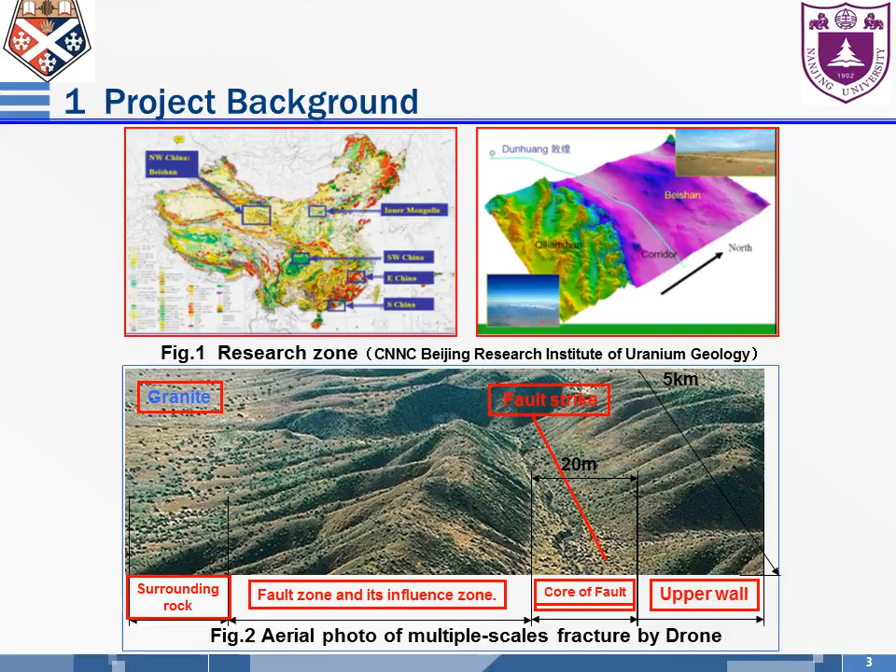This is the background. Figure one is the research zone, which is in Gansu province, China. Figure two is an aerial photo of the multi-scale fracture by drone. You can see there are a lot of kinds of fracture in this research zone. Due to tectonic movement, fault fracture zone, injuries of the nuclear area, and the influence zone, these multiple sets of cracks can cause poor conductivity and low permeability coefficient in the development of hard rock fracture seepage channels into different scales. It is likely to become a potential groundwater migration channel.

So the field of underground engineering is facing huge challenges. To more accurately grasp the characteristics of the permeability of the rock mass and fracture at different scales, analyzing the phenomena of geological structure internal model, genetic mechanism and dynamic principle is particularly important. Fracture and pore medium migration rules can provide a scientific basis for underground engineering.

Figures 3, 4, and 5 show the fracture zone, damage zone, and surrounding rock fracture. These fractures are exactly what we want to research.

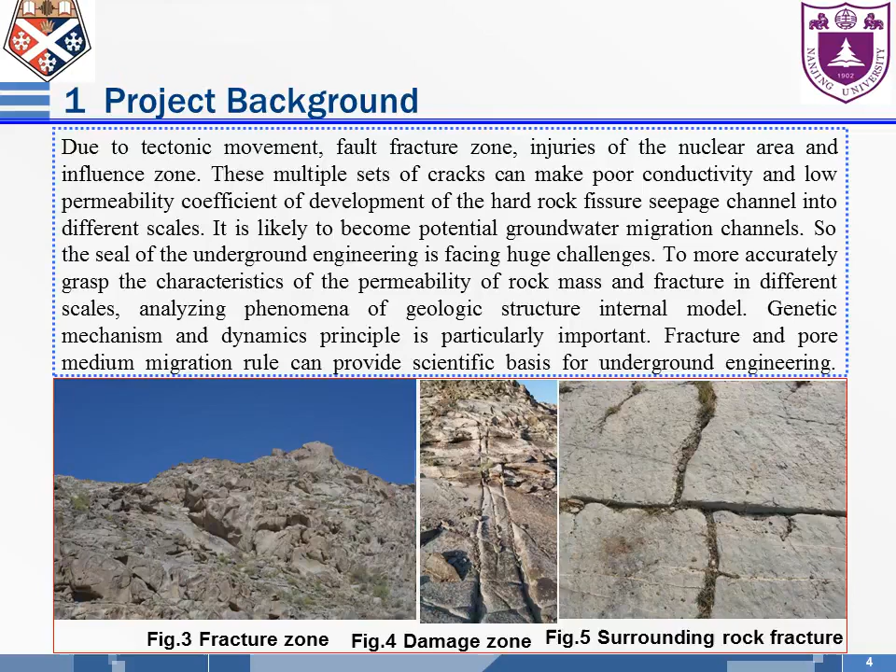Different scales of fracture have different meanings, and they are graded based on the scale of the structure surface, which is generally divided into five grades. The first and second grade fractures can be referred to as fault zones, mainly researching the control effect on regional structure. The fault length and width difference is the macroscopic guide water dominant factor.

Third, fourth, and fifth grade fractures can be collectively referred to as joints, relatively small in scale, with the main research on outcrop, palm surface, and probing fissure joints. The extension length and opening degree of the joints are the main factors affecting the local stability and permeability of the rock mass.

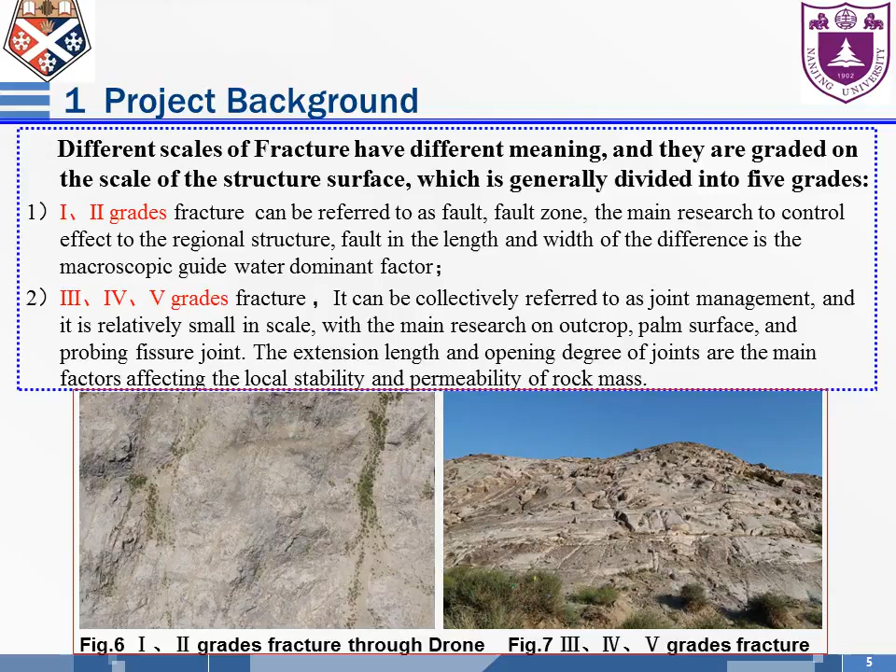Figures 6 and 7 show the first, second, third, fourth, and fifth grade fractures through drone and photographs.

So most of my project can be seen from figure 8, the sketch of the nuclide transport at multiple scales of size and depth of the fracture.

I want to figure out the relationship between the apparent resistivity and the multiple scales of size and depth of the rock fracture with ERT. The first is the size, the second is the depth, and the third is how to reflect the effect of the plastic tube, which stands for higher resistivity, or iron tube, which stands for low resistivity, and the tank.

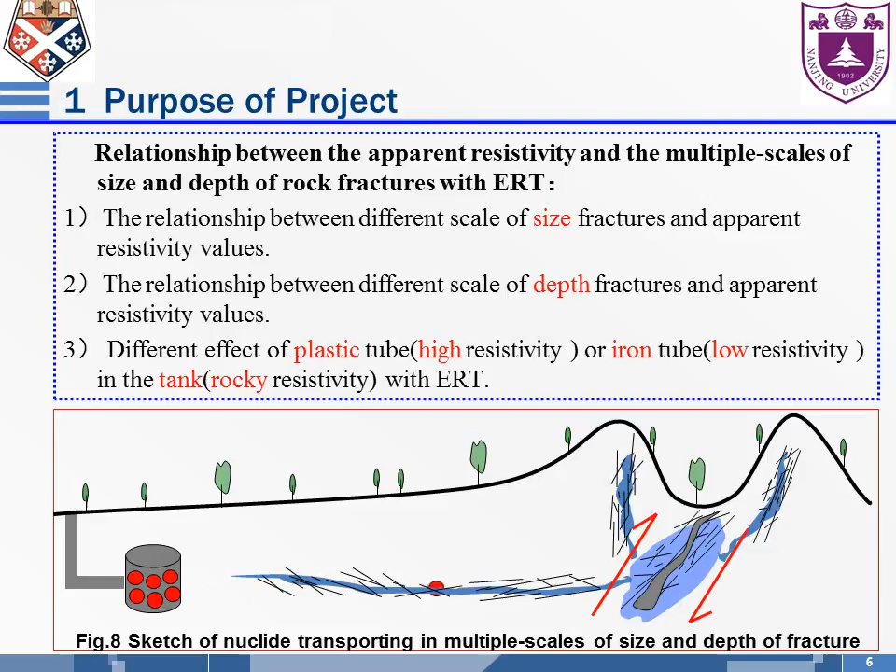The tank stands for the rocky resistivity with the ERT. In figure 8, you can see the nuclide transported over time in the fracture.

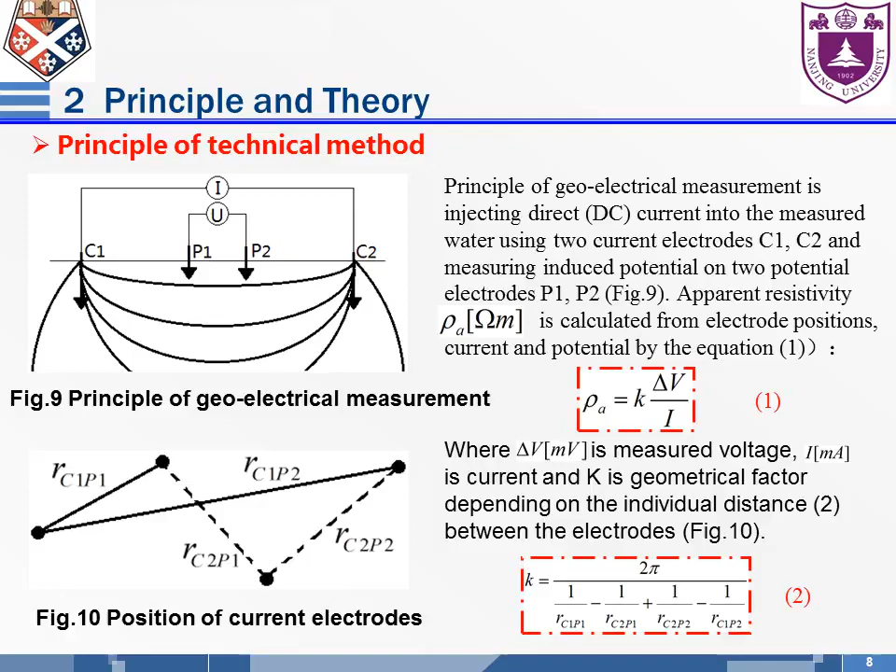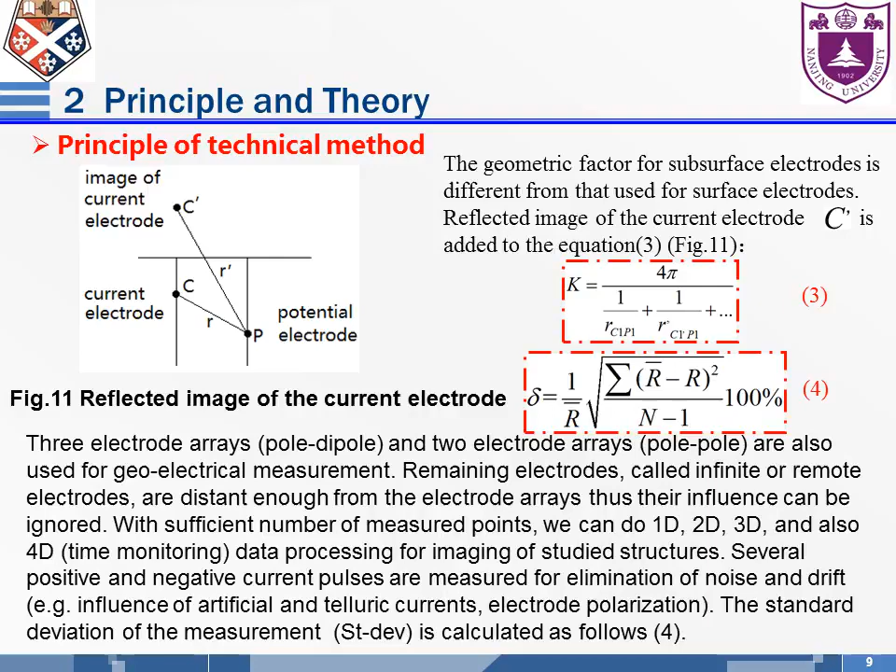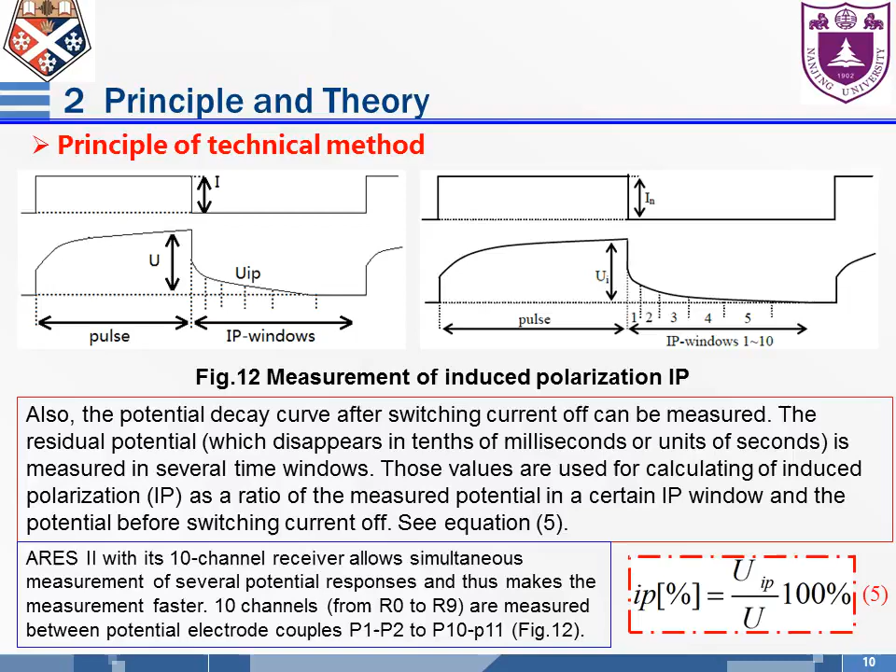The measurement of the induced polarization (IP) is mainly done with the ARES II series. The ARES II, with its 10-channel receiver, allows simultaneous measurement of several potential responses, making the measurement faster. This is the equipment we use; our third part is methods, parameters, and equipment.

Here is the sketch map showing different equations and electrode configurations. You can see the different positions of the electrodes in different kinds of measurement methods. But the different arrays can also be calculated into the same parameters. I'm going to choose the first one, the Wenner-Schlumberger array.

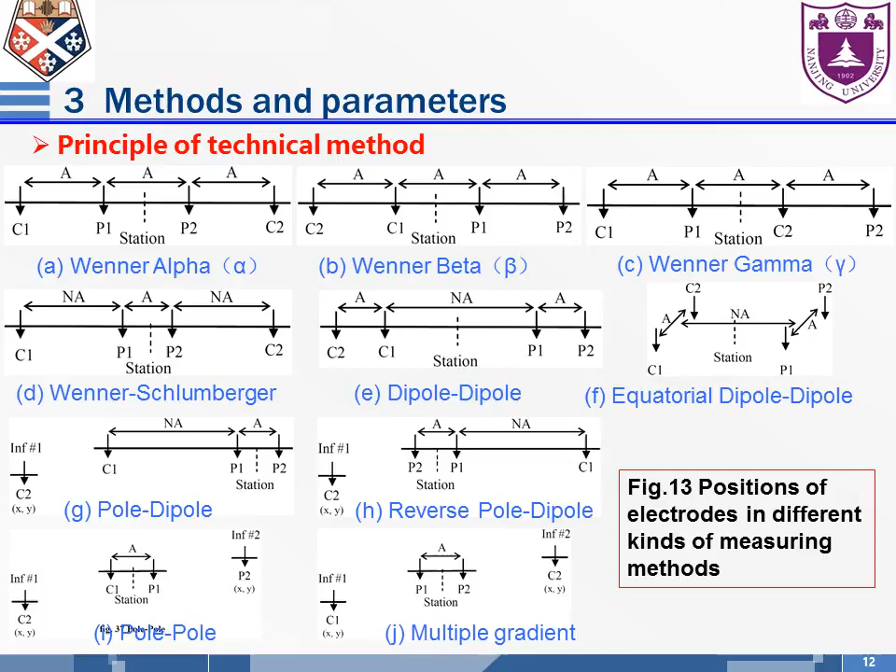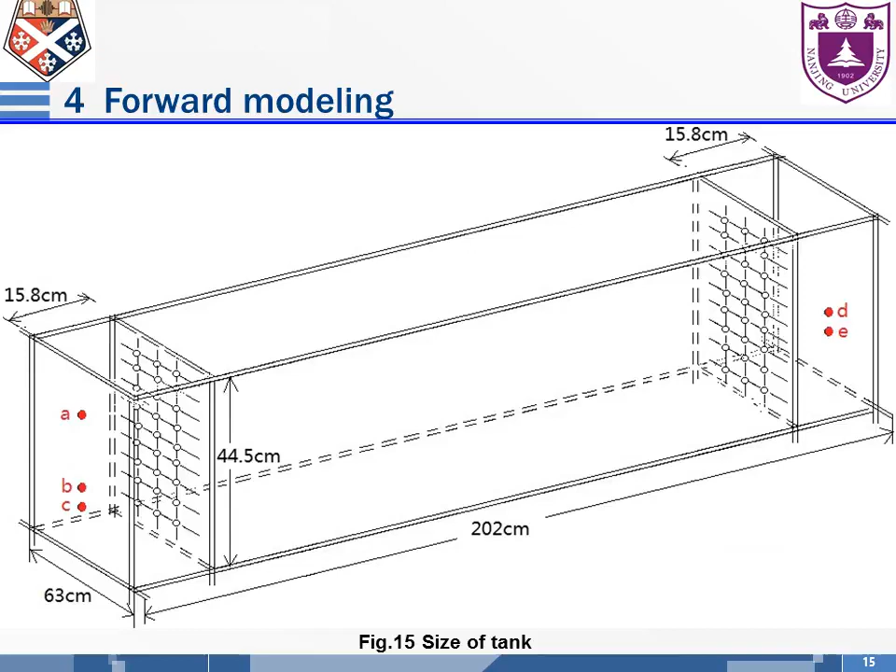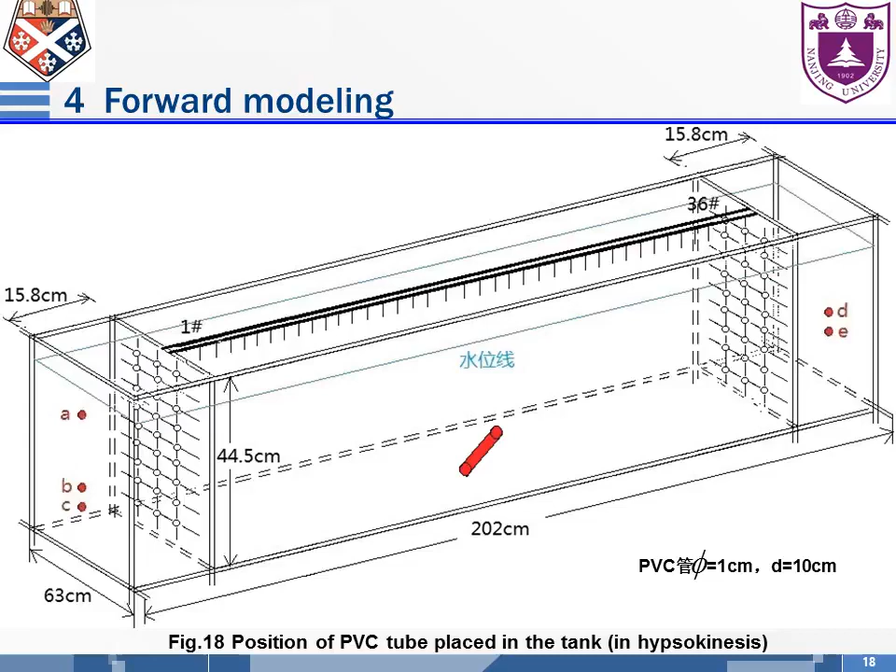This all the equipment, and the fourth part is the forward inversion and the experiment, this is the forward modeling. I built it as the experimental test, like the tank, same size and same condition. This is the plastic, PVC tube I placed into the tank, in what you call hypsokinesis flow rate. This is forward modeling.

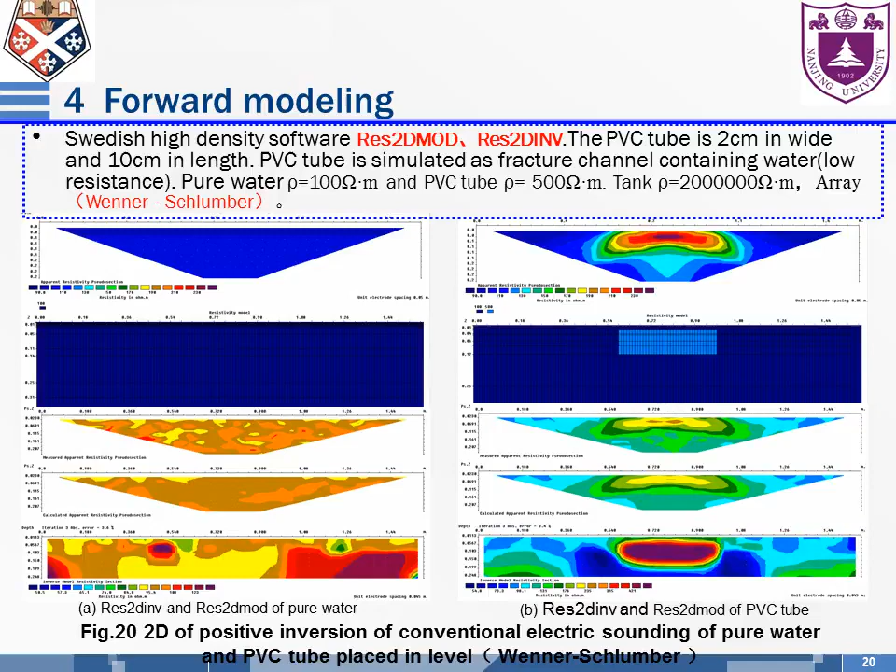I use the Swedish high density software, Res2DMOD modeling, and the Res2DINV inversion to calculate the PVC tube. From the left is pure water, and the right side is a PVC tube. I placed it in level, you can see it has a good effect.

This is using Advanced Geoscience Corporation EarthImager 2D high density software. I calculated the high and low resistive fracture tube. The tube is 2 centimeters in length on the side. High resistance is for air, and low resistance is for water. You can see there's a good, abnormal response of the forward model.

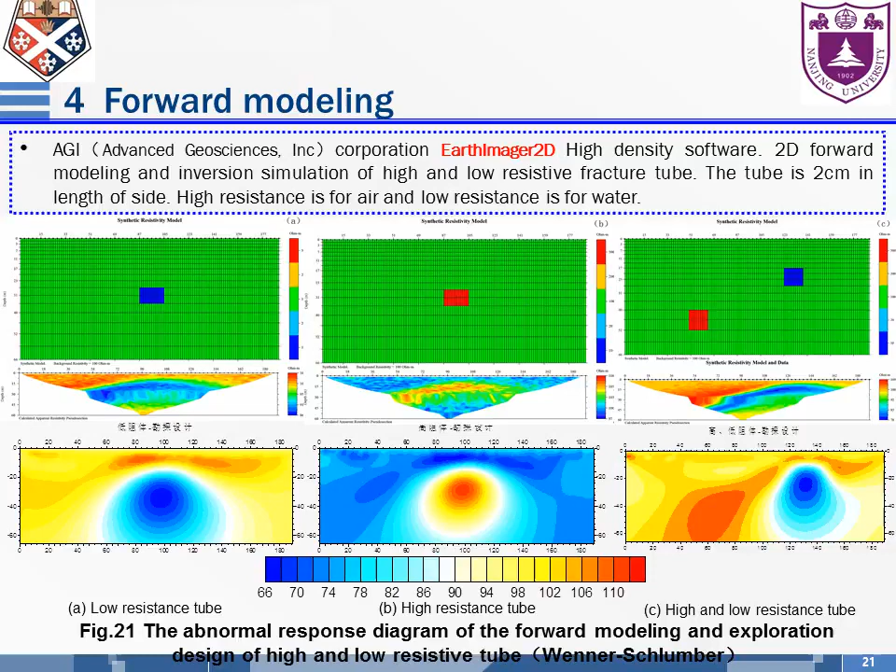Exploration design of higher and low resistive tube, the array I used was Wenner-Schlumberger. I simulated it as the fracture channel. The blue stands for the water channel, and the red one stands for the air channel. You can see the abnormal response.

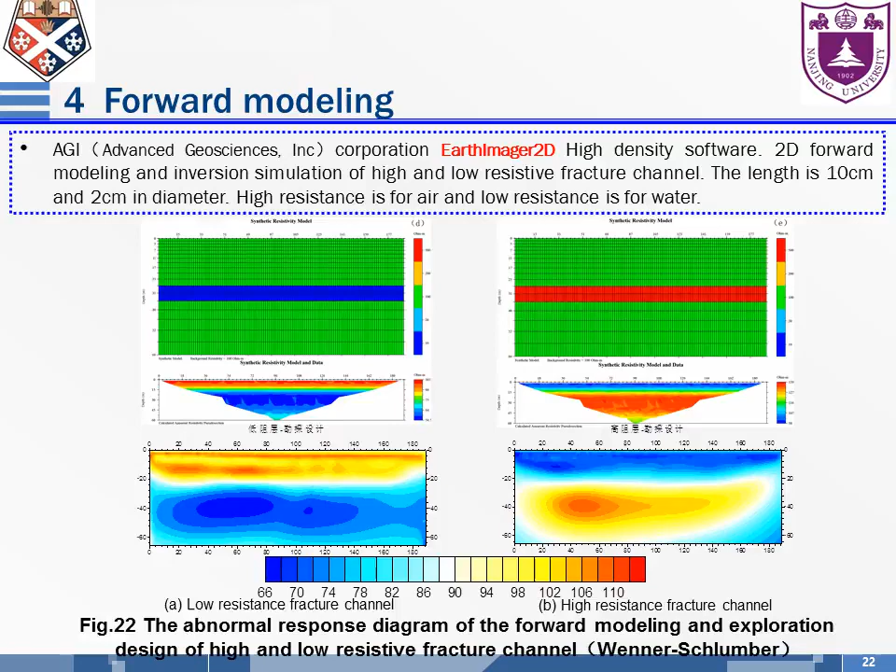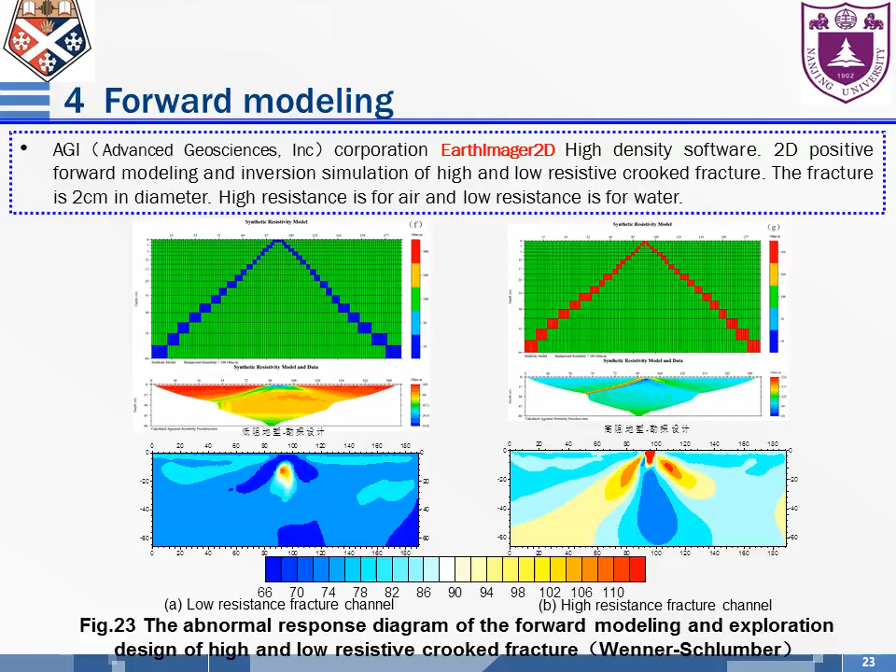This stands for the crooked fracture. The blue one is also the higher resistive, low resistive fracture channel, and the red one stands for the higher resistive crooked fracture. That also has a good effect, but not very good.

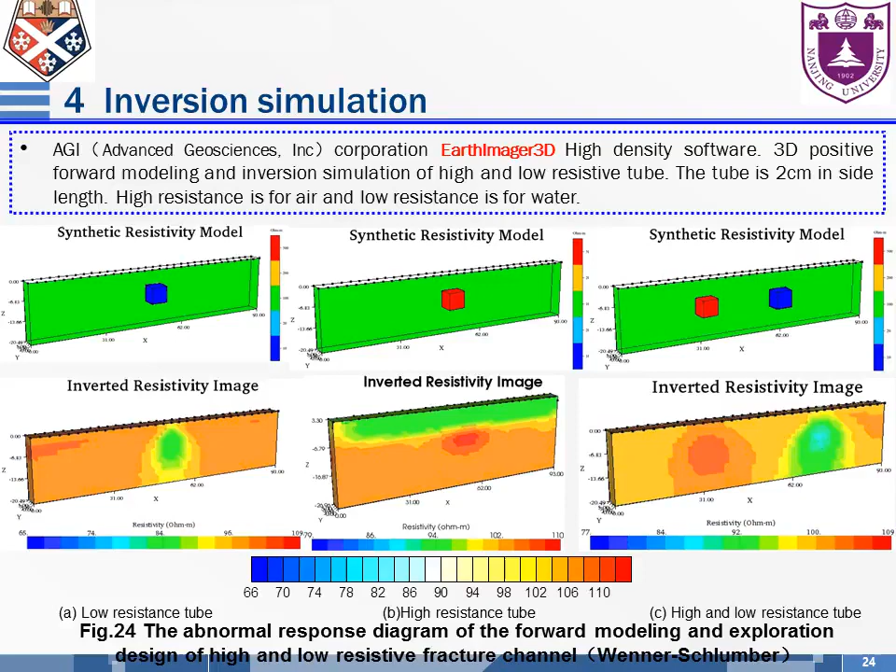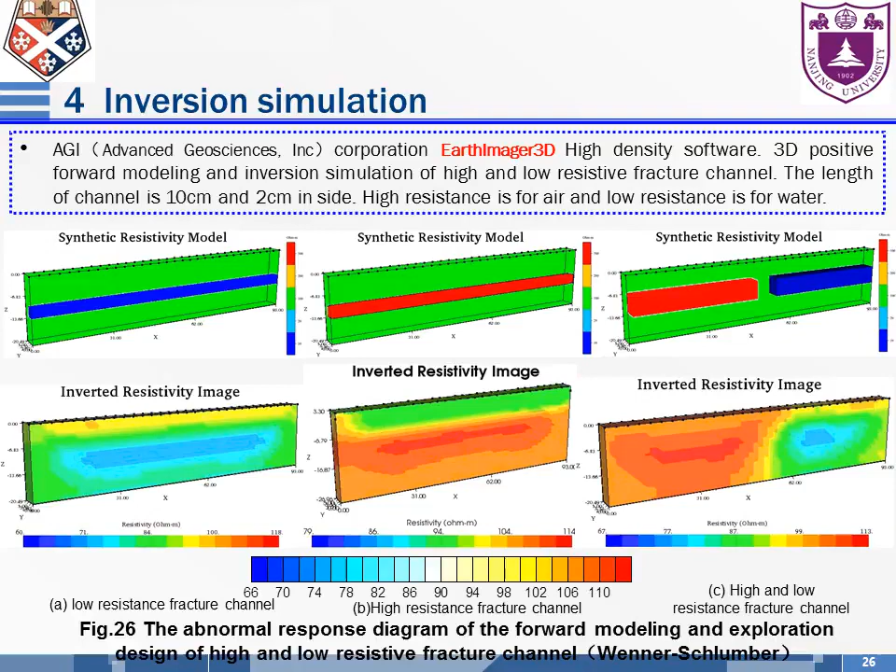This is an abnormal response slice map of the high and low resistive tube, standing for the fracture channel. You can also see some good effect and exploration design in figure 26. This is an abnormal response slice map of the high and low resistive fracture channel.

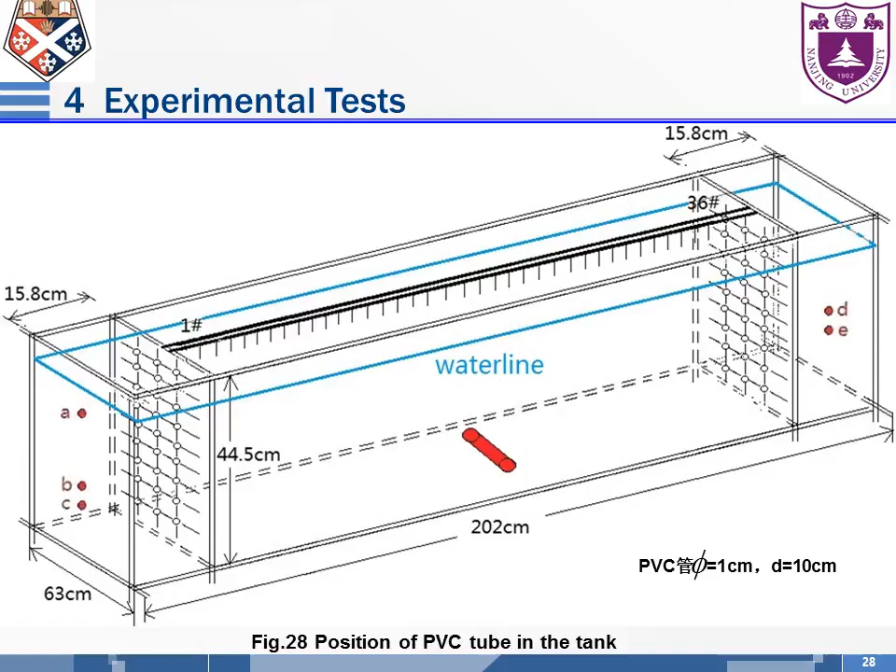After all this forward modeling and inversion simulation, I carried out a lot of experimental tests. This is the position of the PVC tube in the tank, and this is a flow rack. You can see exactly the same size, position of the electrodes, and some of the parameters of the electrodes.

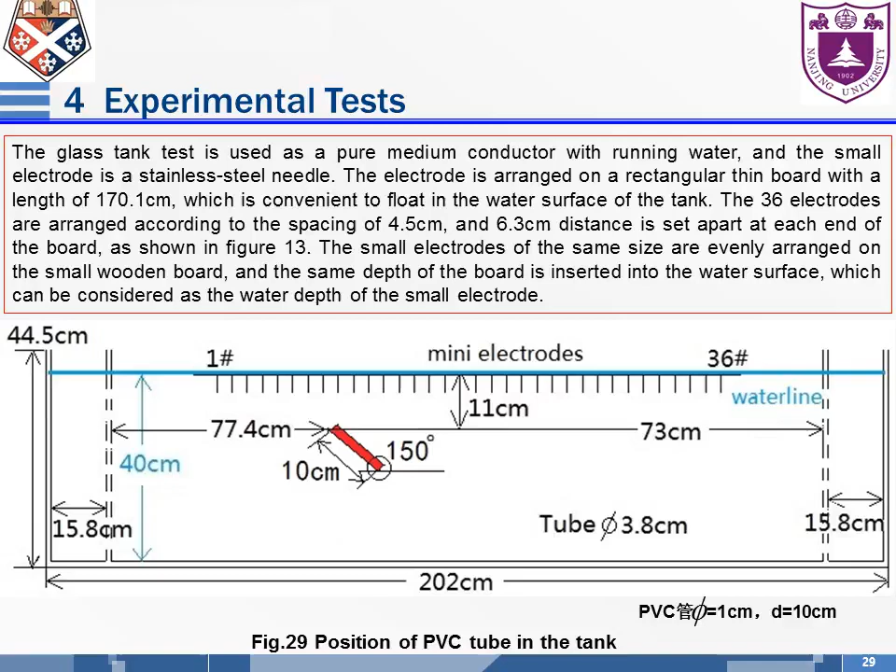This photo stands for the experimental test procedure: the tank, the fracture model, the copper electrodes and instruments, and the forward modeling and inversion simulation.

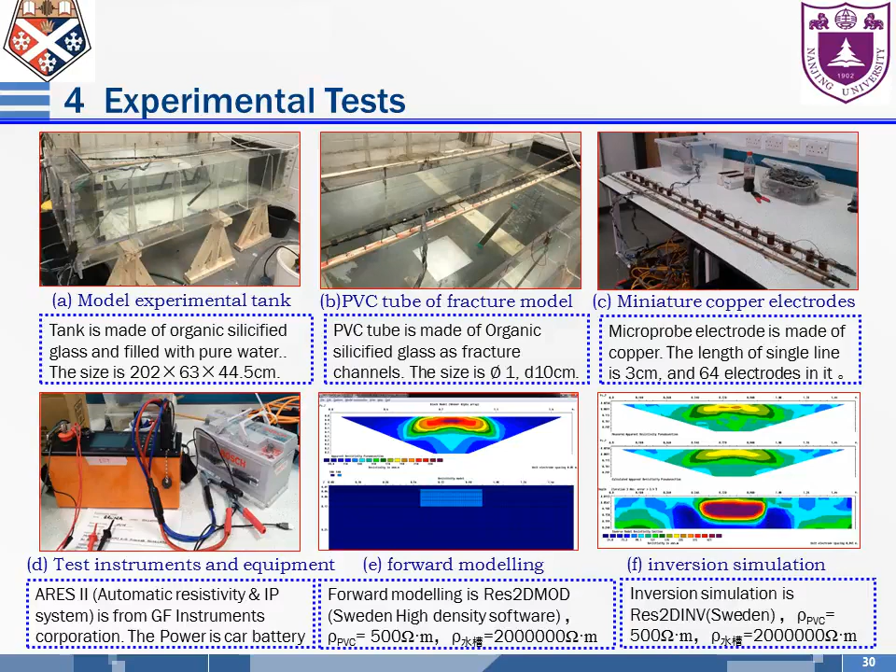Finally, I got some results of the physical simulation test of the small scale fracture monitoring issue. I carried out a lot of tests, but this one is typical, it has exactly what I want.

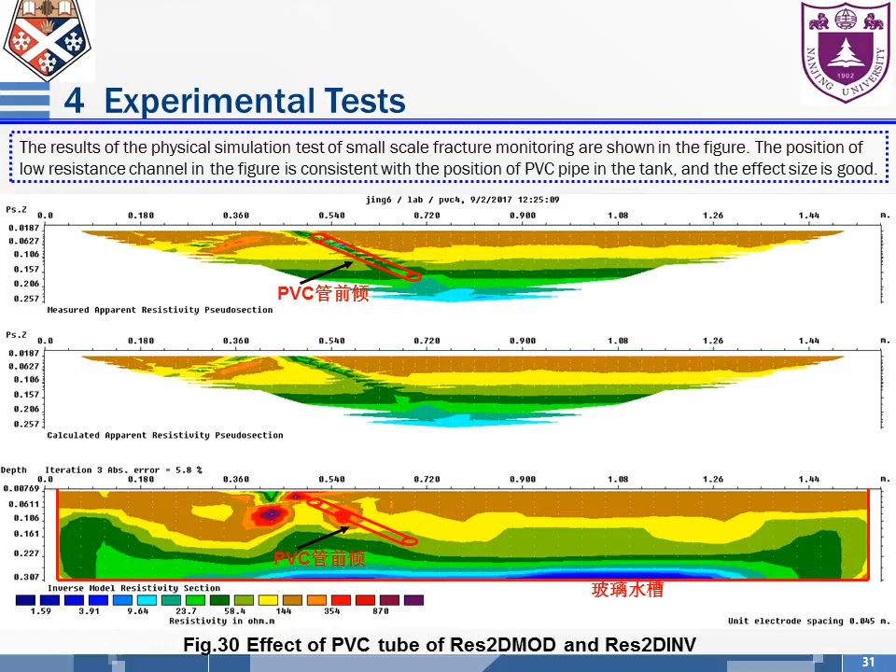The position of the low resistance channel in the figure is consistent with the position of the PVC pipe in the tank, and the effect size is good. You can see from figure 13, 30.

So let's move to the results. I come up with four conclusions. The first, you can see the blue represents low resistivity and the red represents higher resistivity. There is an obvious low resistive channel in the middle of the tank, that's what we want.

The second is the position of the low resistance channel is consistent with the position of the PVC tube in the tank. The third, meanwhile, because of the boundary effect, the length of the low resistance channel is much longer than the real size of the PVC tube.

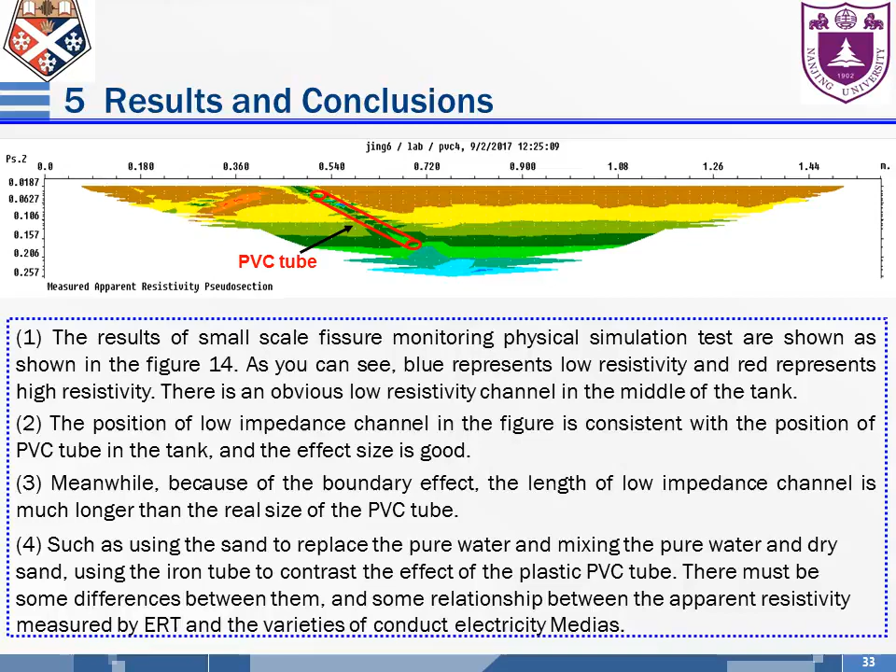So, given these findings, I want to replace the pure water and mix it with drier sand, and so on. I will do this in the future.

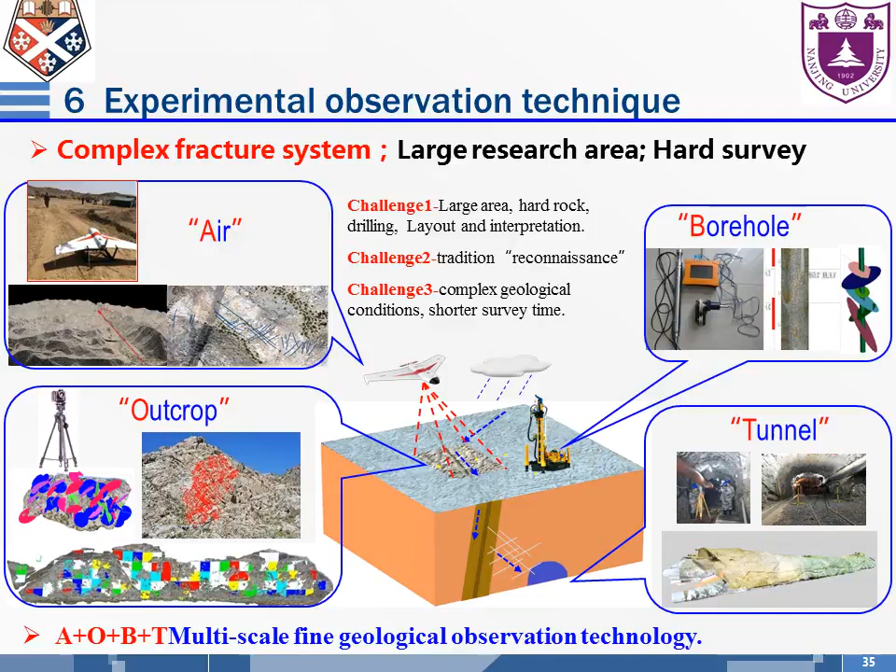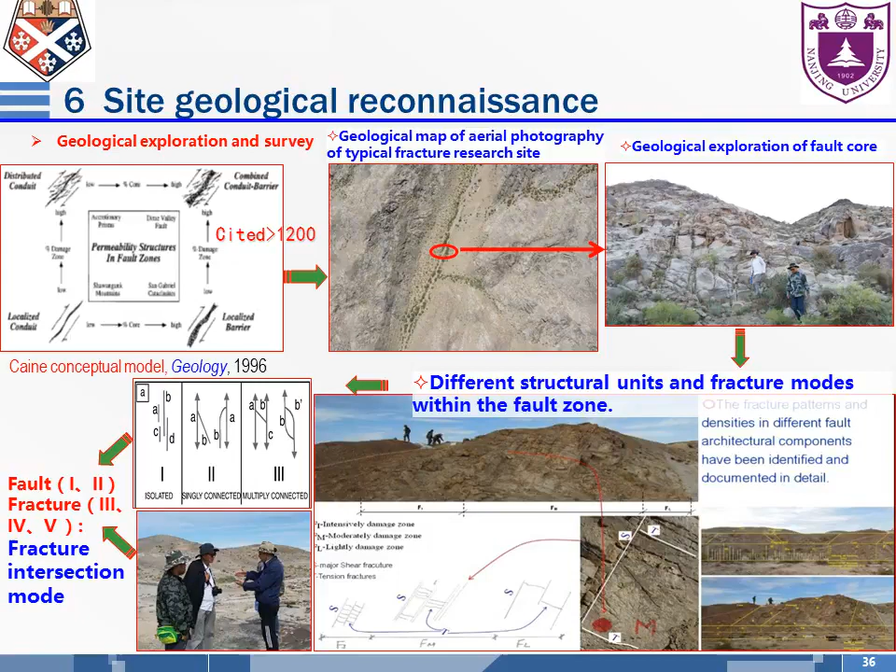I did some fieldwork in Gansu province. Through the air, outcrop, borehole and tunnel four steps, I came to geological observation technology to find out. We also did a lot of geological exploration and survey in Gansu province to find out which site is good to detect.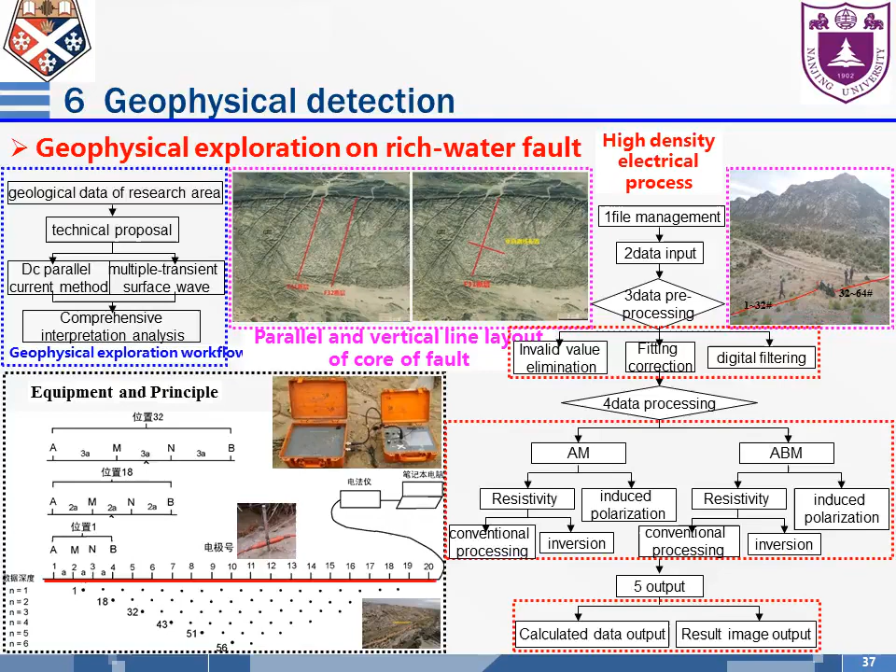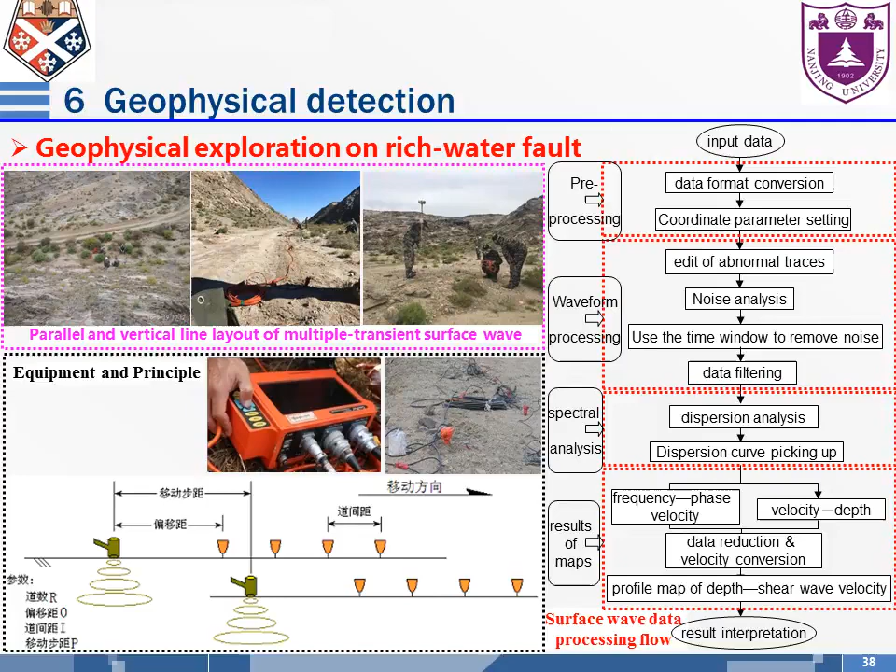So finally, we came up with geophysical detection. One is a high density electrical process, that's ERT, and we placed two lines, parallel and vertical, alongside the core of multiple-transient surface wave. Both effects showed the fault core rock interface and complete form. Most complete rock interface is buried deep below the surface at 20 meters, and there are several kinds of multiple cracks and fractures, shown in figure 31 and figure 32.

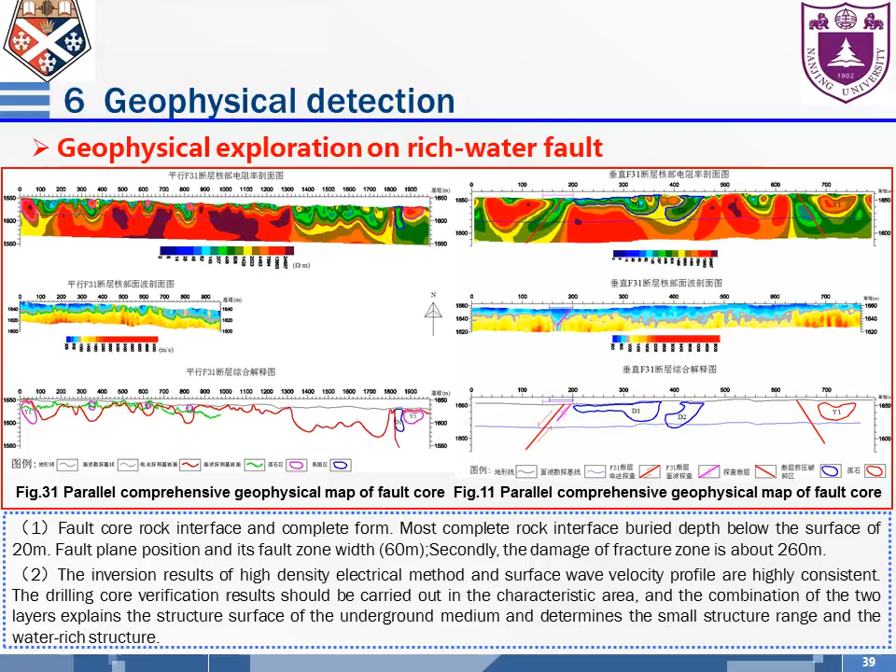I want to thank Professor Alexandra Talentina again, and Bruna. They gave a lot of help to me when I was at the University of Strathclyde. Also, I want to thank Professor Li Xiaozhao and Professor Liu Lanbo, who gave me a lot of chances to explain my ideas and to publish on this special session.

So I will carry on my research deeper in the future, to make a lot of contribution to geophysical detection.